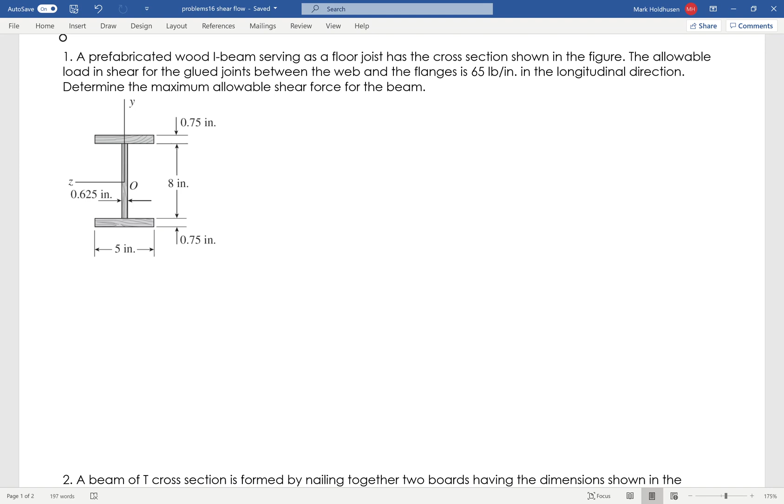Okay, so I got an I-beam here. It's held together by glue in between the sections, and that glue can allow for 65 pounds per inch along the length of the beam. So I want to figure out how much shear force it can handle so that it does not exceed that 65 pounds per inch along the length of the beam.

So we're going to use our shear flow equation, which is lowercase q, which is basically force per length, and that equals the shear force times our Q all over I. So it's a very similar equation to the shear formula. It's just finding the shear flow rather than the shear stress.

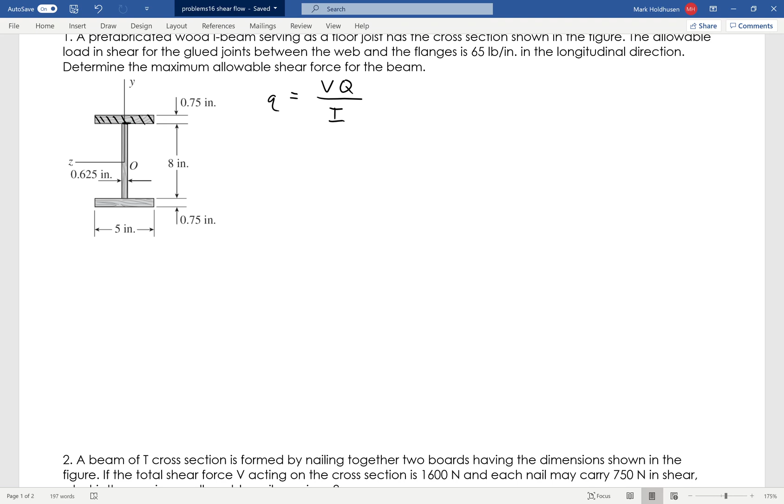So again, what I want is to figure out what's going on at the interface between the two boards. So I'm going to make my cut there, and that's where I want to determine the shear load to make sure that the glue that's holding it at that point is good. So I'm going to look at that Q, the area right above the interface between the two boards. So that's going to be, again, y bar prime, A prime, and that's of the area above where the glue is, okay?

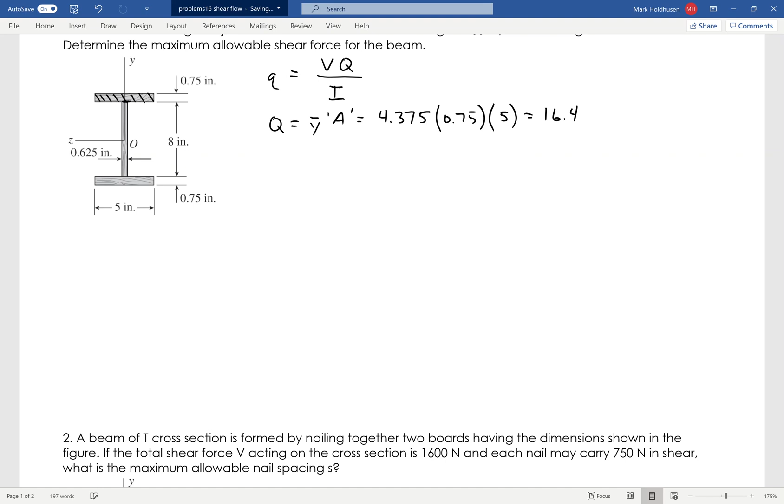The location of the centroid of that would be 4.375 from the neutral axis. So half of the 0.75 inches. And then the area is just 0.75 times 5. And that gives me a Q of 16.4. Okay. And then I need the moment of inertia. I'm going to take the whole outside minus the two small rectangles.

So it's going to be 1/12 times 5 times 9.5 cubed. And then subtract off 1/12. The base on this one would be 2.1875, and again I get that by subtracting off the 0.625 from the 5 inches and then dividing that by 2.

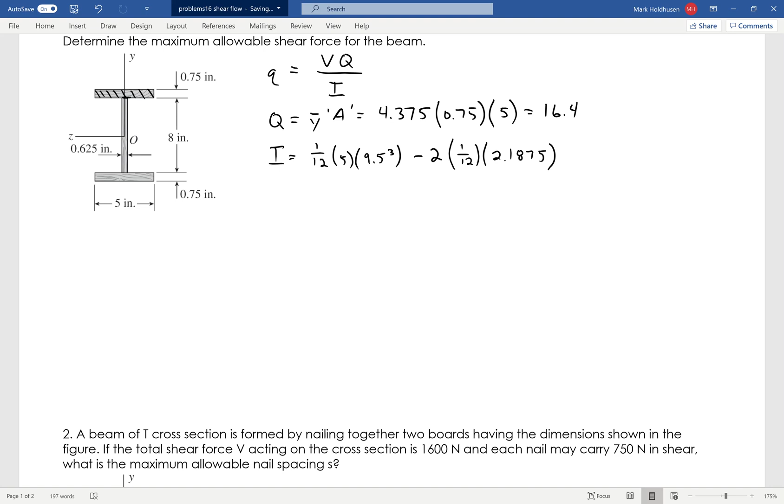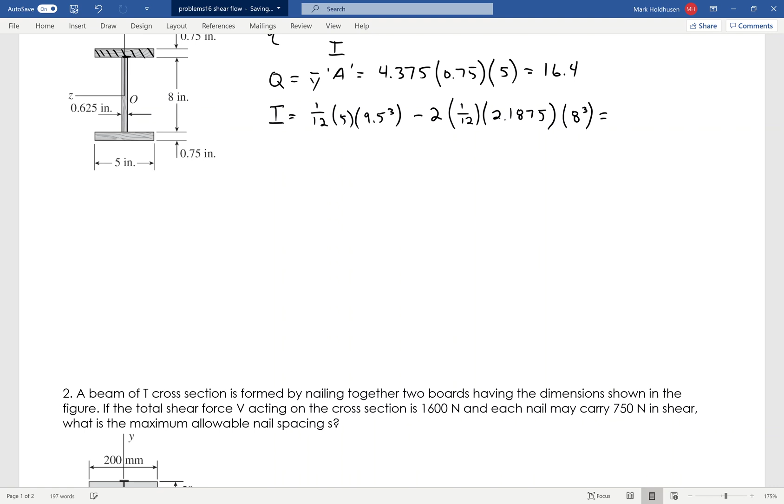But then ultimately I'm going to be multiplying it by 2 because there's two rectangles that I'm taking care of here. Anyway, the height of it is 8. That's pretty straightforward, cubed. So the moment of inertia is 170.6. Okay, so now I've got this.

So again, I want q to equal 65. I don't want it to exceed 65 pounds per inch. V is what I'm looking for. I throw in Q, which is 16.4. Throw in I, which is 170.6. So from that, I can find that the allowable shear is 676 pounds. That way the glue, which can hold 65 pounds per inch, will not fail with that sort of a shear load.